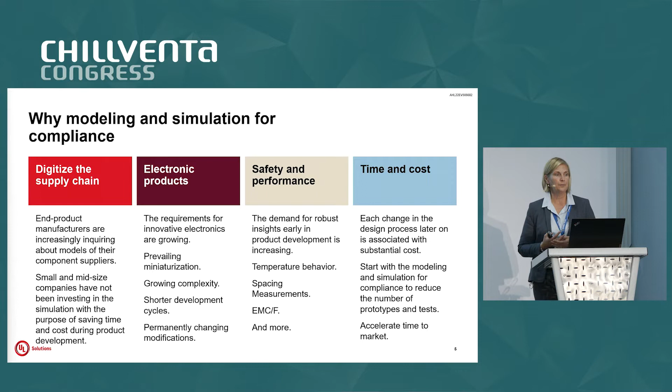So here are some additional aspects why modeling and simulation can be really interesting. Most companies have a simulation team, they have product development, and simulation, as I said, has been around for a long time. So why not leverage the expertise for the certification purpose?

The other aspect is the tools. The tools have become much more user-friendly, much more intuitive to be applied, and have really increased in computing power over the last decades. And the pressure for reducing the R&D time is constantly increasing. So with modeling and simulation in contribution to the certification, you can build in the compliance early on and make sure there are no surprises later on.

And also related to the cost, obviously, is reducing the R&D cost. This is for many companies today one major reason for growing their margins and becoming more efficient.

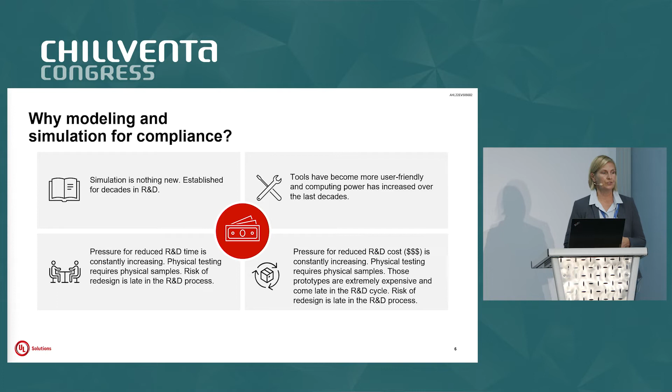So what does it take for a company like UL, a testing, inspection, and certification company, to accept models in contribution to the certification? It's a slightly different approach than the modeling and simulation that would be applicable during product development. So what we would like to provide and contribute is this whole governance around the models that you would be submitting in contribution to the certification.

And that means it's not just about the results, it's really the whole process. How was the model built, what risks were taken into consideration, and all the aspects that go into building that model for specific physics. And then being able to trace and explain the results, understanding the data, the mathematics, the calculations behind it is a very important aspect.

And then another piece or key reason is the context of use. What is the model intended to solve? What is it supposed to address? Very specific. What is the question that is being answered with the model?

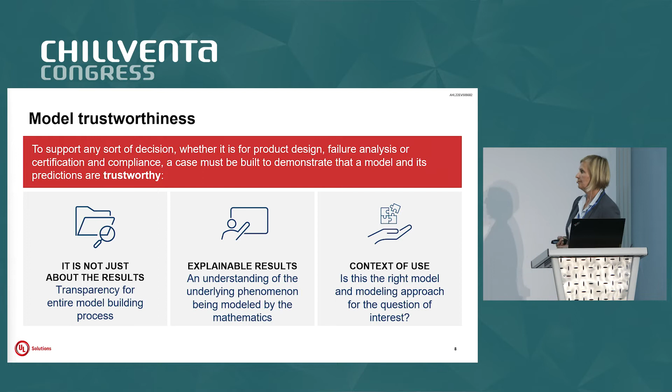And we would like to help establish that trustworthiness into the model so it can be acceptable for a certification decision. And there is no simulation, no digital simulated model without a physical validation. So that goes without saying. We're not looking to eliminate all physical testing, but at the end of the day, it can be significantly reduced by applying modeling and simulation in contribution to the certification.

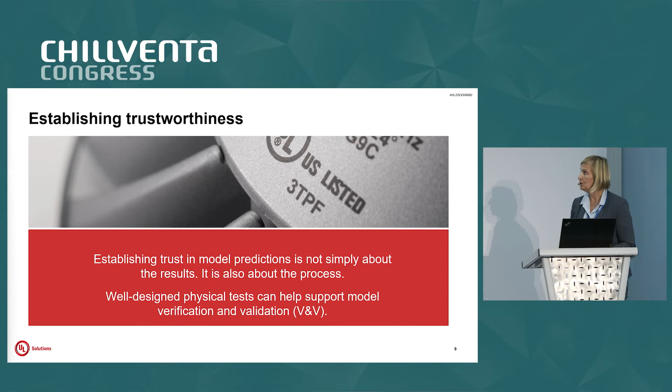And we introduced a robust verification and validation of those models as an independent third party to help our customers, manufacturers of end products and component suppliers, to build models that can contribute to the certification. So here, summarizing the key elements that will make a model acceptable is the context of use, the model V&V approach, the assessment of the modeling approach, very important.

Who has built the model? How was the data generated? How were the tests set up and designed? And then ultimately, we will review, assess the submission package and provide the customer with very detailed feedback on whether it's acceptable or what the customer may need to modify.

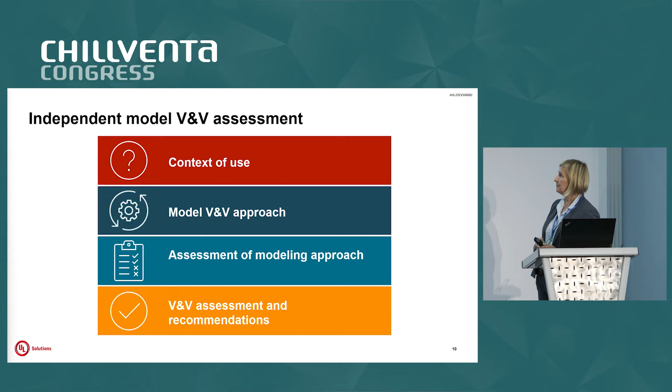So we put together some key ingredients, as we call it, to really make sure that this is helpful, it's beneficial, and it is enabling our customers with a verified, validated model to really be able to decrease the testing at your end and make the certification process much more efficient.

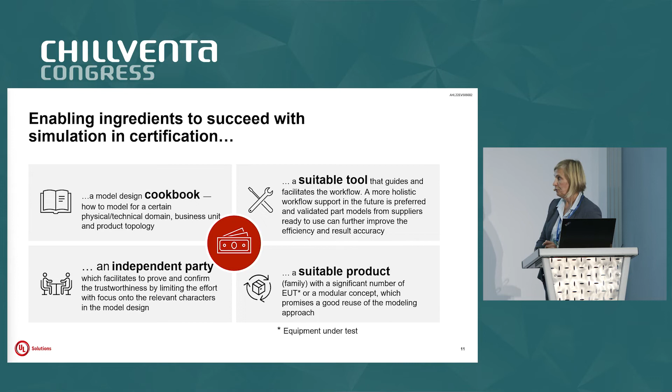So what does it mean in more detail, the deployment of modeling and simulation for certification? There are different types of predictive models. One is we're focusing on the computational multiphysics, so it's about the EMC, the temperature test, mechanical structural type of simulations. And then the other key approach to the modeling is the statistical machine learning. It's all about the data-based and algorithm-based type of modeling.

Most of our customers will come and request our support with the computational multiphysics. Temperature test has been a very popular test to be simulated. It has been well established, something that a lot of customers see a lot of value in. And we have created a robust verification and validation framework. This is not something that we had developed from scratch all by ourselves.

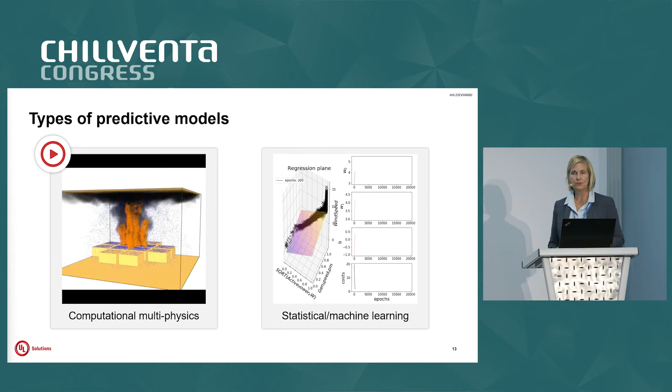There's a lot of scientific research already established, a lot of frameworks out there that we were very selective in gathering the key aspects from. Some have been very well established, some have been around for a long time, like the NASA framework for the verification and validation of simulated models. So based on that, we pulled together a robust approach to be able to verify and validate the models in contribution to the certification.

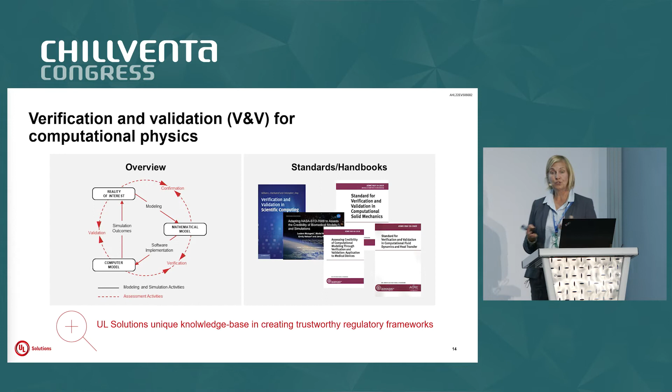And we'd like to work through the entire supply chain, starting with the components into the end product, and then ultimately going into the system and the assets, making sure that the models are verified, validated, and acceptable for each stakeholder in the chain. So it's really the predictive models themselves. Just providing a model itself is not sufficient, as you can imagine.

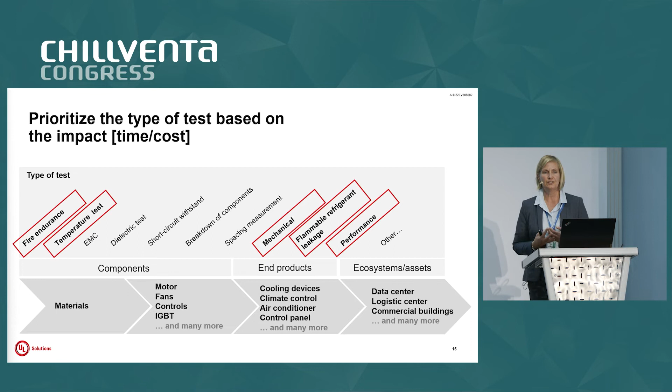There's a lot of modeling and simulation happening with different objectives, different purposes, but it's really the whole process and what all is going into it. Initially, it takes additional effort, additional time and investment, but as you're going through the product lifecycle, introducing design variances and changing of components, it becomes extremely attractive, because you can always use that verified, validated model for future design variances, component updates, and so on.

So initially, it's more work, more time that has to be understood, but when you go through the life cycle, it pays out.

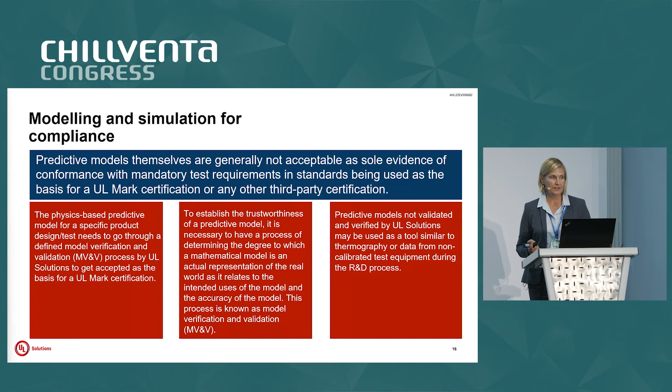It's important to select the right product or product platform. It's especially interesting for products with a lot of variances—some products have hundreds of variances—so modeling and simulation is especially useful for these categories. I'd say it's not interesting for every product, so be selective. Also, with very customized products, it makes a lot of sense to apply this to product platforms, again where you have a number of different product variances. This can be very interesting.

The other thing we learned throughout the process is that physical validation testing, as part of verification and validation, may be a little different than traditional physical testing for certification. You may have to add more thermocouples to identify the right heat spots. It's a slightly different approach from the certification testing referenced in the standard—initially a bit more rigorous—to establish a robust model that can then be accepted into the certification decision.

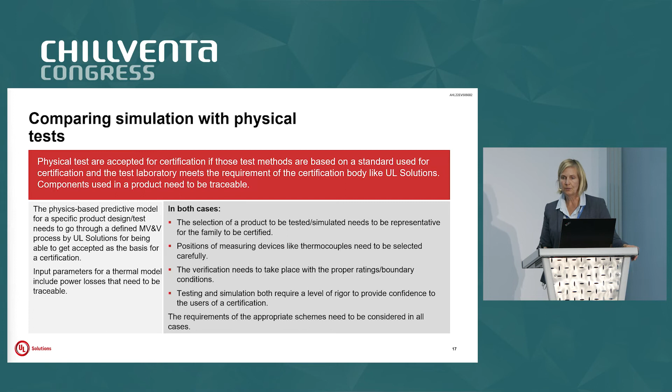Ultimately, it's about engineering judgment. Modeling and simulation can provide a lot more product insight. What I also learned from my colleagues in the science and technical teams is that, despite being around for 20-plus years, they never learned so much about the products as they did with modeling and simulation. This helps them, together with our customer, provide robust engineering judgment to make sure there's no remaining risk of non-compliance, or more importantly, of any safety or performance issues later on.

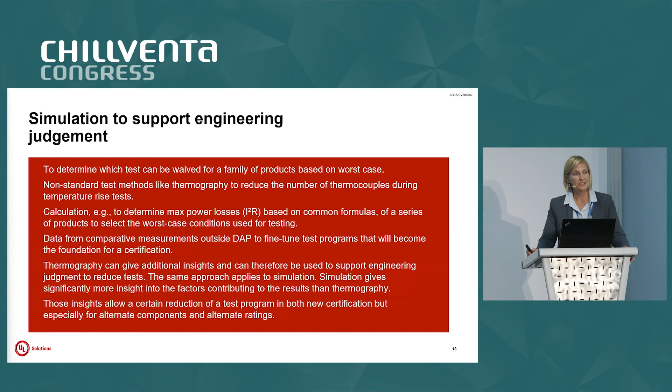So just to summarize, the benefits of validated simulation models are pretty evident. Reducing risk is the number one benefit we keep hearing—avoiding any surprises just before the customer or manufacturer goes to market with a new product, but also throughout the product life cycle with design variances.

The second key aspect is reducing effort—not only in terms of cost, but also the number of prototypes. Ultimately it always leads to reduced cost, but also the effort in building prototypes and booking test labs, since R&D isn't always available. Setting up and running tests—all these aspects can be optimized by applying modeling and simulation in contribution to the certification process.

Extended testability—being very rigorous and trying new approaches for physical validation testing—can be extremely helpful. And applying modeling and simulation provides a lot more detail, as already mentioned, which can help with root cause findings much faster, and certainly be a source for more innovation in product development.

Are there any questions? Thank you.

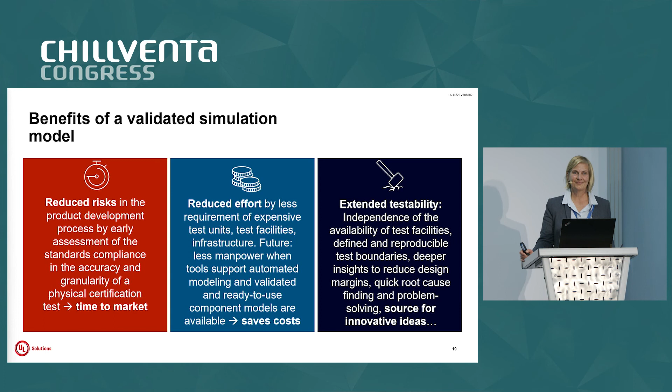So you have a product, maybe drilling into the basics a bit more. You have the product and the corresponding product standard. The standard requires a list of tests that need to be conducted—EMC, temperature tests, depending on the product. A lot of times there are mechanical structural tests involved. By applying simulation, the customer can determine which test they may want to simulate in contribution to certification, reducing the number of lab tests and the need to build prototypes. It could be EMC or temperature testing, but remember, when we simulate one test, the temperature test for example, you still need to conduct the other tests required for certification.

So it's just one test. We have projects where the customer would like to do multi-physics—temperature tests, mechanical tests, some vibration tests—that can be simulated and then become accepted into the certification decision.